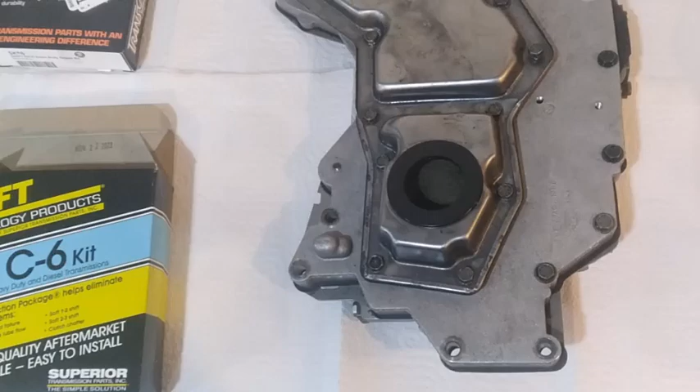Alright, I got everything here. I got two different shift kits, so I'll be able to replace every spring inside the valve body.

I've got to drill some holes, change some springs out in the kit, and I got a new filter for it. We're going to tear it all apart and put all new springs in the valves.

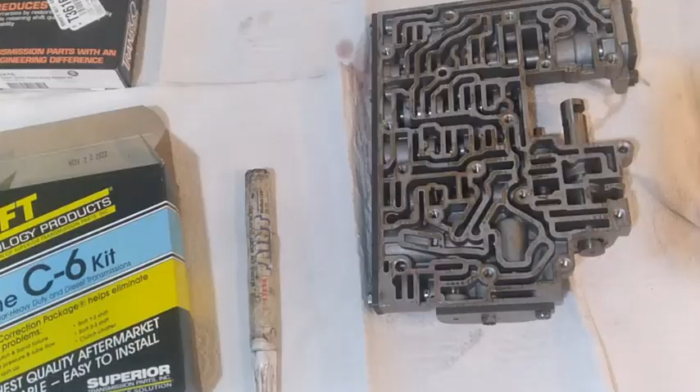And make sure this valve body's ready to go. Okay, so I got this valve body. First you take the filter off, then you split it away, and you get just the valve body.

So you want this to come off that plate, but the plate actually comes off like this because there's a check ball, two springs, and a spring and a hat. The spring and hat go right there.

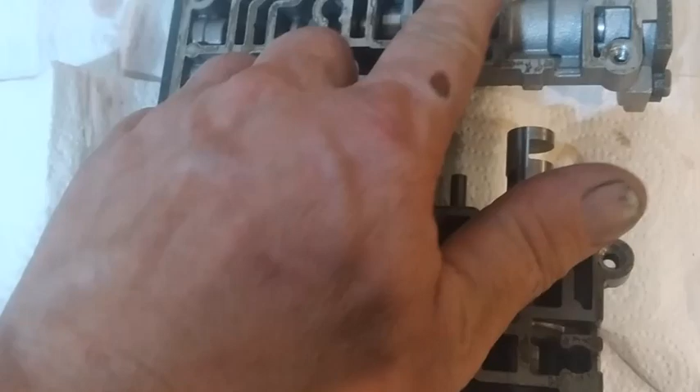One check ball goes right there, and the other ball and spring goes here. I've got an earlier model than '77, so there's no ball here.

So this is like a '76 by the casting number on the other side. That casting number right there. The letter tells me the decade, and the number is the year.

So what we're going to do is follow the directions on this rebuild kit. One of the things it tells me to do is drill a cross hole in this for heavy duty and towing in a diesel.

So what we're going to do is drill a hole. It says do not drill anything over a 16th hole in there.

The other kit says 0.055, which is not a 16th, and they give me a drill bit for it.

There's no hole drilled in there yet between those two pockets, and it had a minor shift kit put in it before.

So we're going to follow the directions and take every one of these valves out and put all new springs in, using this kit, before we put it back in — it was making this thing shift pretty hard.

And there's a couple other things in the other kit on how to sand the drum. I got a brand new band, a second shift band, and a brand new filter.

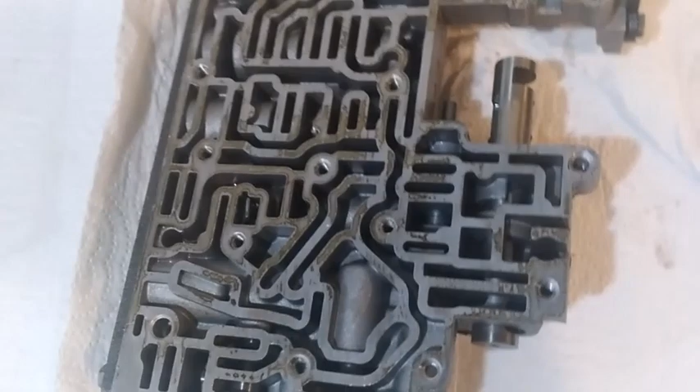I replaced that old filter, and we're going to start now. I'll show you each valve as I tear it apart and put new springs in it.

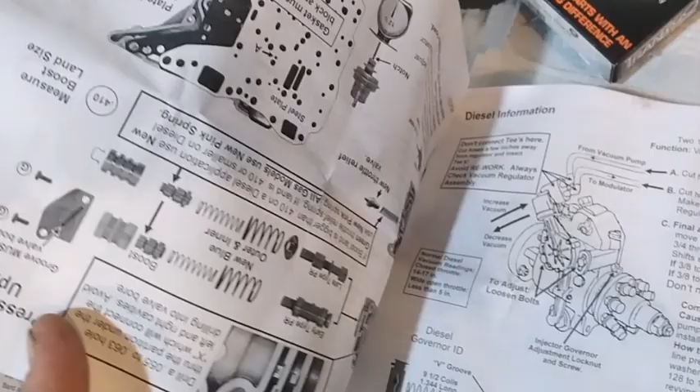Okay, so step one, we're going to use this kit — it comes with more springs in it, so we're going to try to use most of the springs out of this TransGo kit. There's a diesel and a gas version, but this is a gas application.

So the very first thing we need to do is pull this valve out here, which is the boost valve. So I got it all pulled out. I need to pull the boost valve out of the inside there and make sure it shifts.

But here's the factory set of springs, and we're going to put these new dual blue springs in, clean it up, make sure everything shifts, and then that end cap has to go back on with the groove.

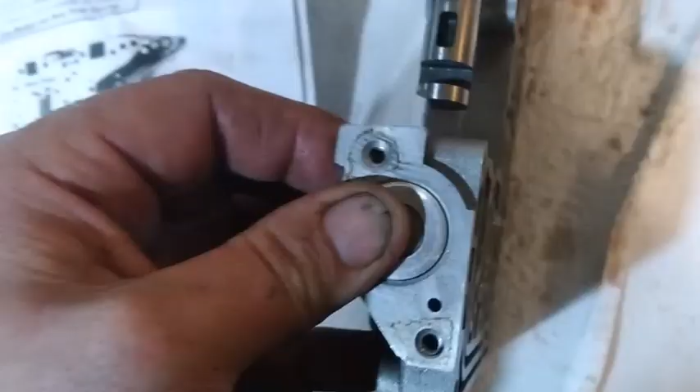So we're going to do that, put this valve back together now. Alright, I got it all back together, and it has to be able to drop down flush so that plate will come on, with the valve already seated all the way in.

So now I can put that plate on — it has a groove on the other side. I'll be able to put that plate back on and torque it to 40 inch-pounds. So we got this one valve rebuilt.

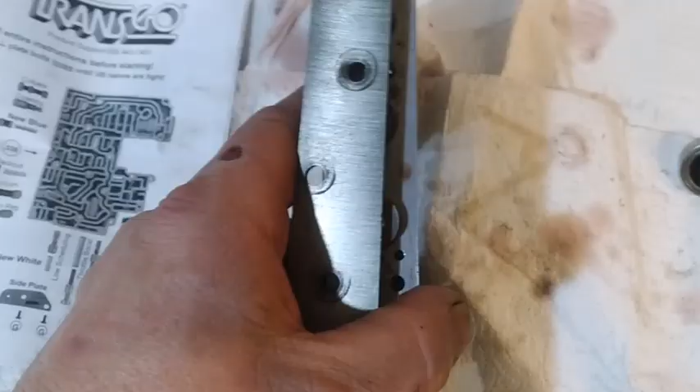Alright, so I've taken the side plate off these valves, and we're going to start going through and replacing the springs on it.

Okay, I got all the valves pulled out. The trick is to have a little magnet, and then you can go in there and fish out the stuff. Some things you just have to tap and let them come out.

The nice thing about the kit is if it doesn't come out exactly right and you lose the position, you can still figure it out — like that T and B valve fell out on me, and I knew it goes into that slot.

So what we're going to do now is just follow the directions and put the springs back, put this back together the way the kit says to. Now this cutback spring, we're actually going to use a spring out of the other kit.

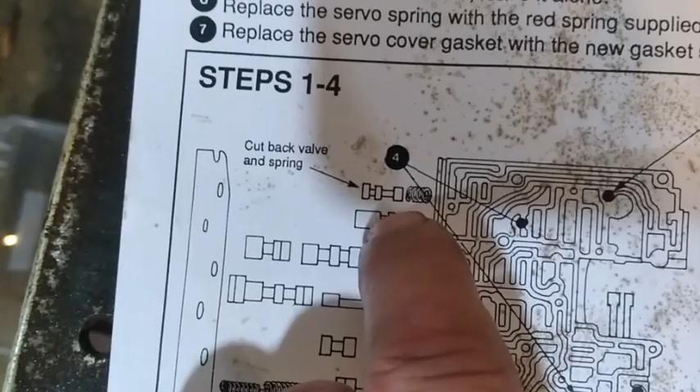There are people who completely block these off so that cutback can't happen at all, but we're going to force it not to be able to lose pressure, so it'll hold pressure longer with the spring instead of blocking it off entirely.

So this cutback — this kit doesn't come with the spring — we're going to use the spring out of this other one and put it in there.

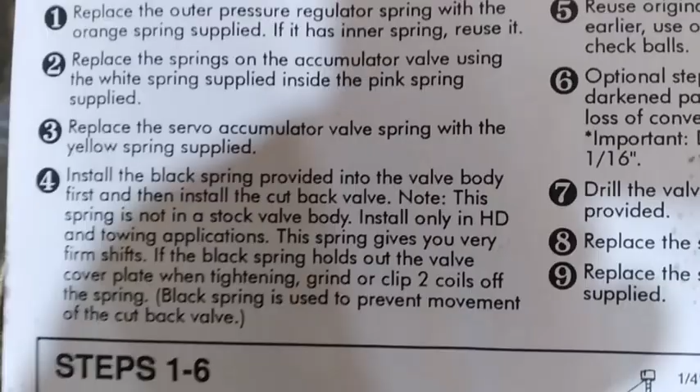All right, here's the directions on what that cutback valve spring is going to do. It says install the black spring in the valve body first, and then install the cutback valve. Note this spring is not in the stock valve body, and it's only for heavy duty and towing applications. This spring gives you very firm shifts. The black spring holds the valve cover open.

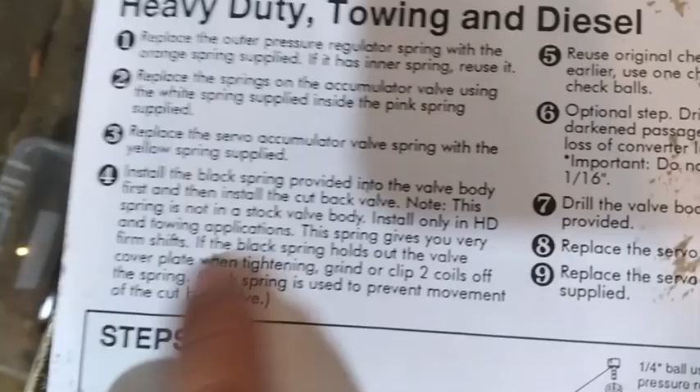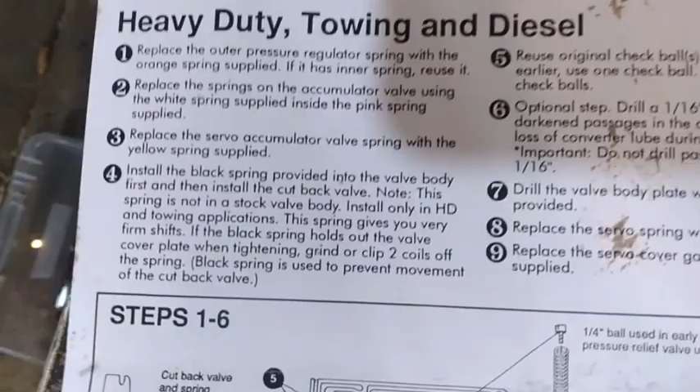We got to trim the spring so we can actually get that plate back on. So they're effectively blocking it off. Some people actually block it off, but we're just going to make it harder for it to push open. It's effectively blocking it off, but it's going to hold the pressure in there longer.

Okay, the coasting valve gets no spring, it just goes in. It's the next one in line. So we just want to make sure it shifts. If it's not stuck in there, we're good.

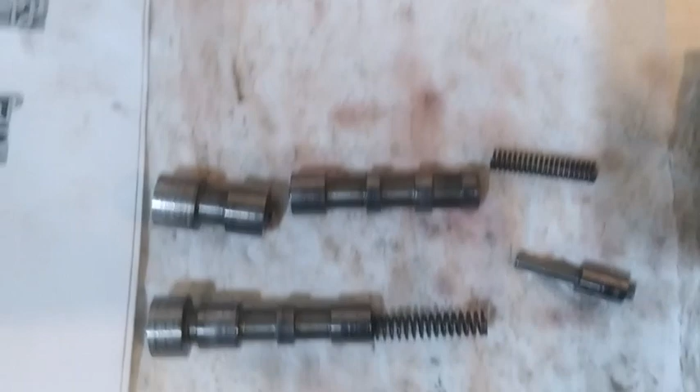So we're going to work on the first and second shift valve now. It tells us to put a new blue spring in. So we're going to get the blue spring out of the kit and put the first and second shift valve in. You can see the difference between the new blue spring and how easy this one is to push. And it's not as long.

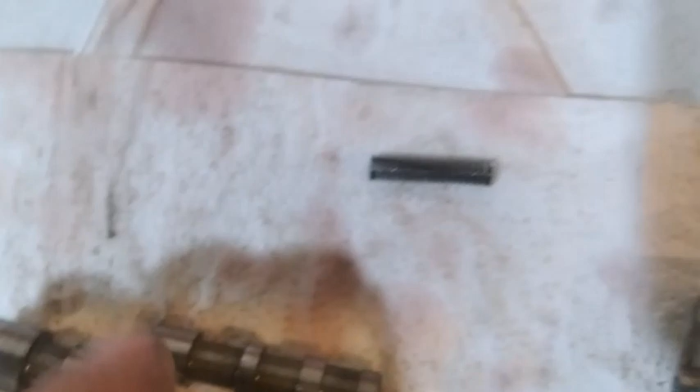So we're going to put it back together. We're going to clean all this off, make sure it shifts, put the blue spring in, shove that first and second shift back in. Okay, I found my blue spring. We're going to put it in the hole and put the first and second valve in. Alright, so I got that first one in and I've made sure it moves.

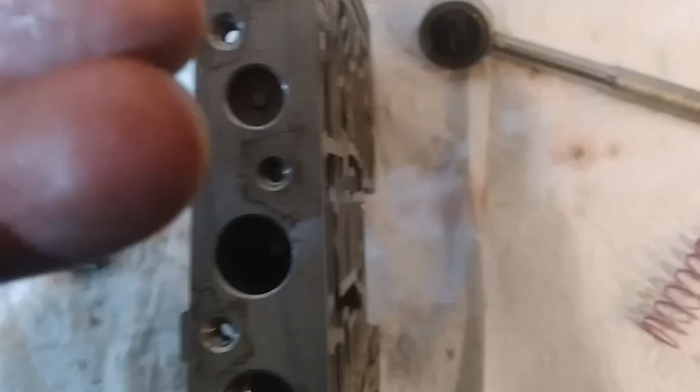Now I can drop the second one in. Of course, I got the drawing to look at and make sure that it goes in the same way. If nothing else, this drawing is worth the 26 bucks on eBay. So we play with it, it'll drop in there. You see how it's in there and moves freely. So that's what we're checking with these valves.

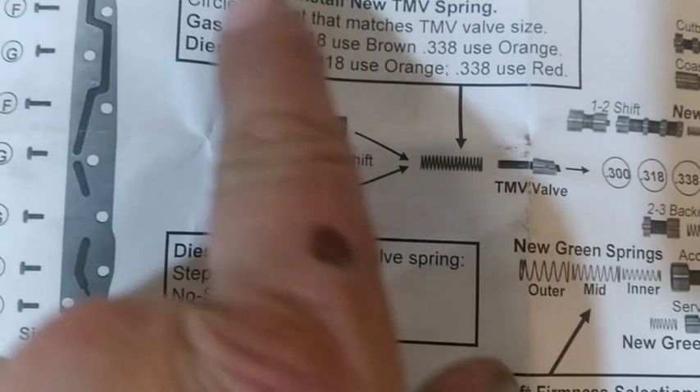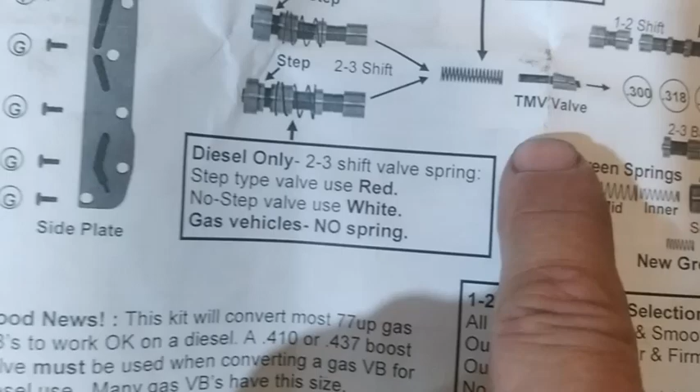Okay, so now we'll go to the second and third shift valve and get it to go in there with the new spring. Now the second and third shift valve tells me to measure the TMV valve. So circle the spot that matches the TMV valve size. So I need to measure this hole for the size of this TMV valve, and then match the size to it.

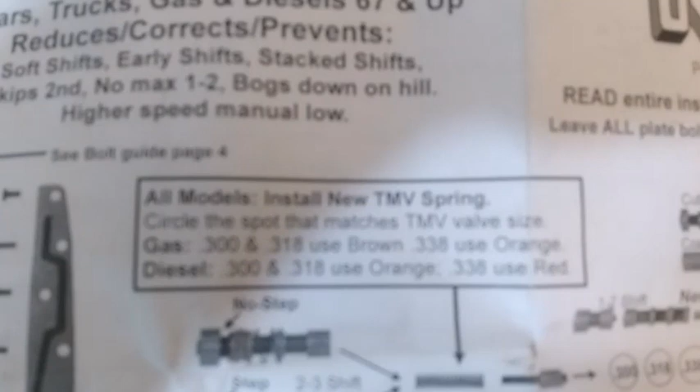So I'm going to mic it and see what I got here. So mine's a .300. So it tells us to grab, on a gas application, .300 and .318 should be brown. So I got to get the brown spring out of the kit.

The difference between the brown spring and the stock spring, it's a little bit longer and a little bit tougher, so it just makes this thing shift harder. So we're gonna take and put the brown spring in now on top of the TMV valve. Now I had to take that TMV valve and use a little awl to get it started. I already know that it's slid in and moving around like the other one. So we're gonna put the spring in on it and then put the rest back.

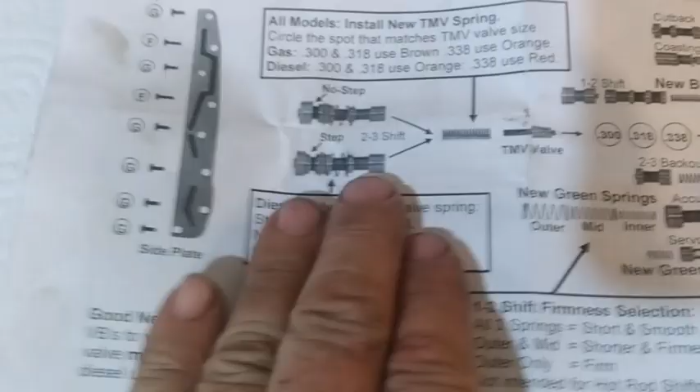If it was a diesel, there's two different springs for the diesel depending on how the valve is. I have a no-step valve and I'm using a gas application, so I don't use this extra spring. The diesel has more torque, so they hold it even harder. So we don't use this spring, and this box and that spring don't matter to us.

So neither kit messes with the 2 to 3 back out spring, so we reuse the factory spring. Of course, we tested, that valve is going up and down, not stuck. So we'll put the 2 to 3 back out valve in now.

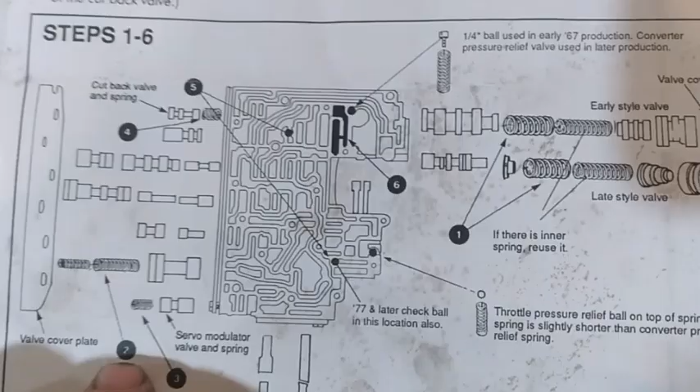This kit gives us 3 different springs for the accumulator spring and first to second shift firmness. We're going to use the springs out of the other kit, where it just tells us to put these two together. So it tells us to put the pink and the white one together.

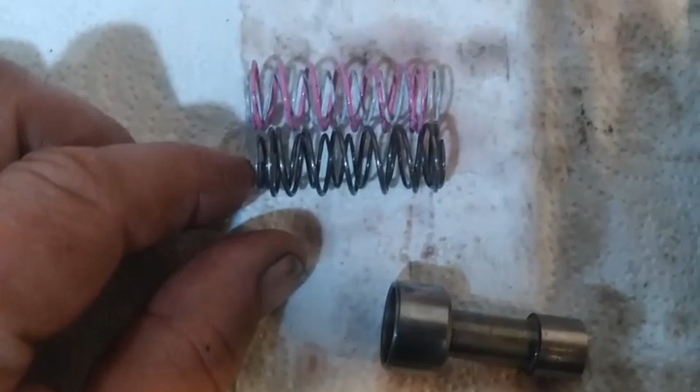So first the accumulator goes in. You can see the difference here. Let me lay the valve body over so I don't lose the work that I've done. So there's the factory ones, and it's pretty close to being the same. But we're going to put these new springs in from that kit, the pink and the white one.

And put the accumulator back in. This is the one that you'll see guys machine a piece for, or even stack full of pennies, when they build drag cars, to where this one cannot move at all. We're not going to block this one all the way off because we're not building a drag car. We just want this thing, if I hook up a bobcat or something behind it, to actually pull way into the gear before it shifts. He actually uses those 410 gears and the lower bands in the transmission.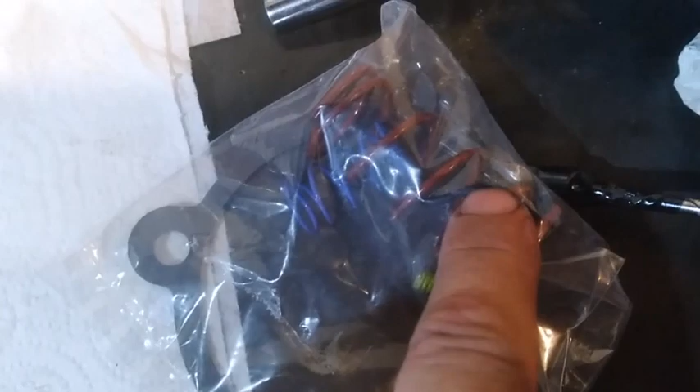Okay, I'm gonna put this accumulator together now. So the next one is the servo regulator pressure, and since we're going to use the large servo spring from that kit, we're going to go ahead and use the yellow spring that it calls for that servo modulator. So inside the servo, inside the transmission, we're gonna put that in instead of the factory spring. But we'll use the yellow one since we're gonna use them together on that, and not use this kit's spring.

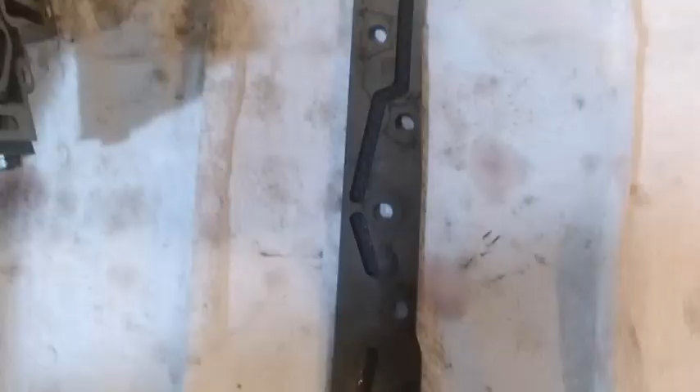All right, so we're gonna put this together now. So putting the end cap back on, you see the passageways. So that has to go in. It's actually upside down right now. So just letting you know that has to be put on right. You're not going to see those once you get it bolted on. So remember how it told us to make sure that was drawn back all the way. So that plate's on, and we got the channels to the inside. You can only bolt it on one way. I mean, you can put it on two ways, but you'll see the channels if you do it wrong.

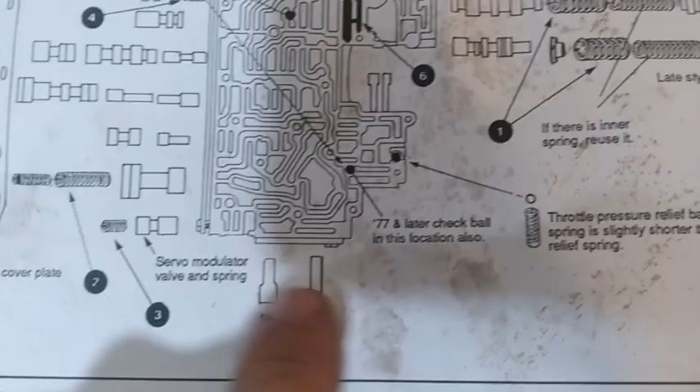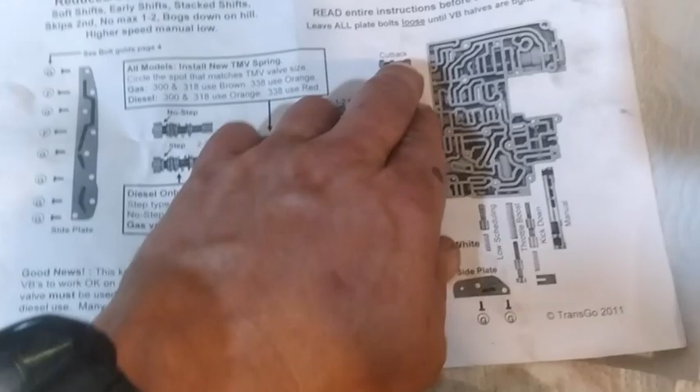So we got all these valves rebuilt, and we got this valve rebuilt. So now it tells us to take the low scheduling valve, the throttle boost valve, and the kickdown valve out, and change these springs. Actually, it only tells us to put the new white spring in on the low scheduling valve. And this kit doesn't even show that one to be touched. So the TransGo kit is a little more in depth than the Shift Technologies, and they cost the same, but it doesn't make the cutback valve for first gear.

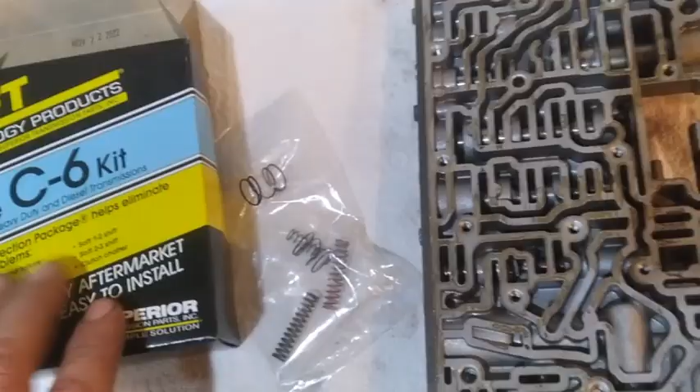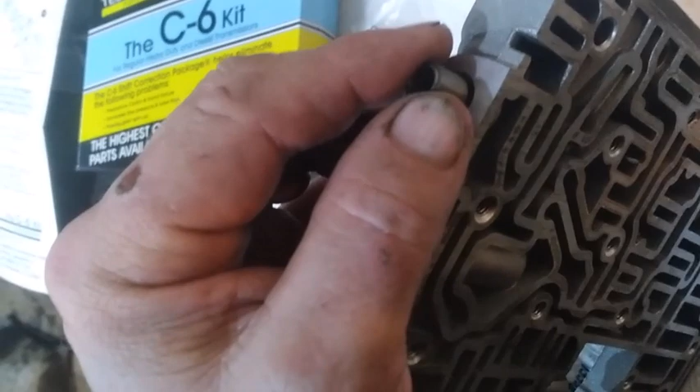Okay, so the low scheduling valve, I've taken it out. I've had to tap it out to clean it, but I got it to where I know it'll go in and out there and float around. So I see it moves. And then the throttle boost valve here, I just made sure I've got it cleaned and made sure that it moves. So now I put the white spring in there and put the cap back on.

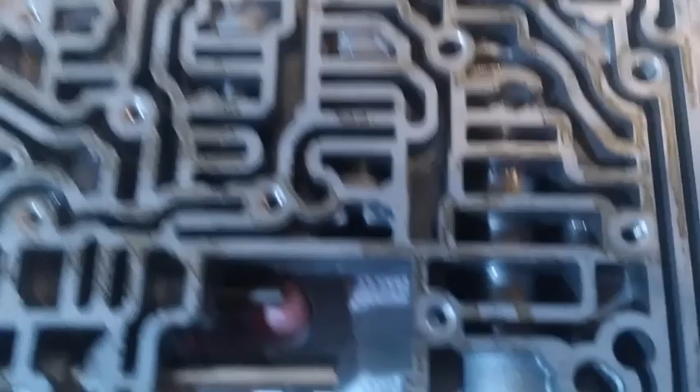The kickdown one, you can take that plate out, but you see how easy it moves. That's where that kickdown fork is going to push. So we don't need to take it out. I'm going to put that white spring on there and then put the cap back on. This cap's the same way as the other one. It has a groove in it, so the groove has to go towards it.

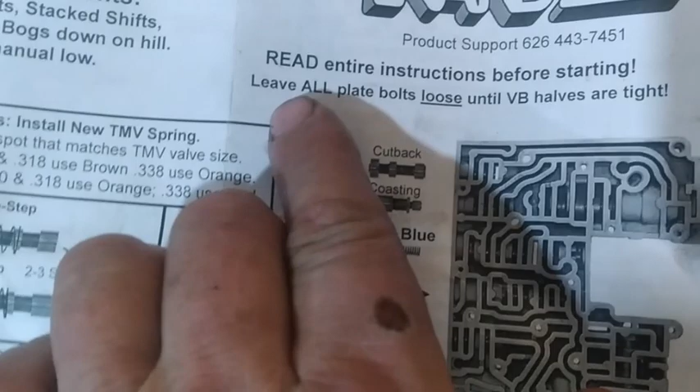And I just noticed these instructions may be a little bit better because it says leave all plate bolts loose until the valve bodies are together. So all the ones that I've torqued, I'm going to loosen them back up. But I need to tighten this one down to make sure that cover pulled tight, like it said. So I'm going to loosen all the covers back up and then put the valve bodies together and then do the inch-pound torquing. Okay, new white springs on. This valve still moves in and out. Put the cap plate back on the right way.

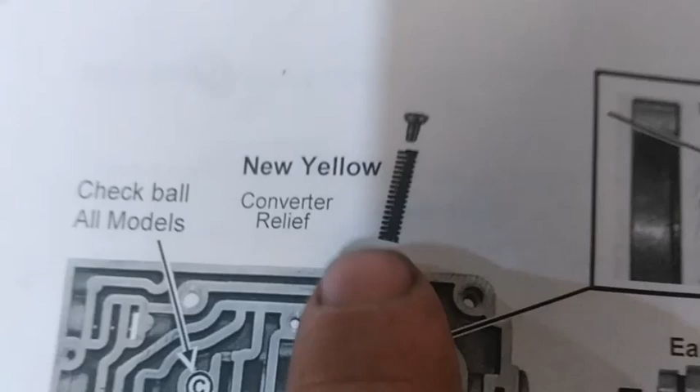Okay, the directions show to use the yellow spring for this converter relief. New yellow converter relief goes in this hole in the valve body. So when we go to put it back together, this and the hat goes in there.

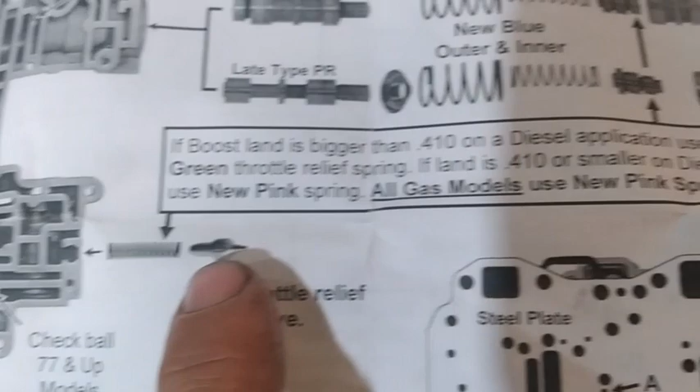And then the 77 later has a check ball that goes here, and they all have a check ball that goes right there. This was really hard information for me to find earlier when I took this apart. But if you buy the kit, it all comes; it says check ball, all models, check ball 77 and up. And then it gives me a new throttle relief valve instead of using a ball. It uses this pin valve.

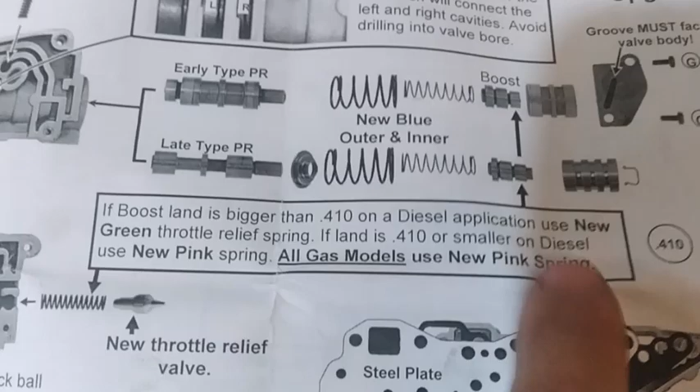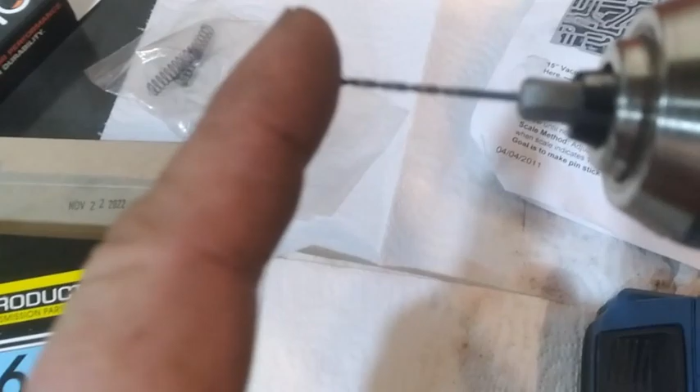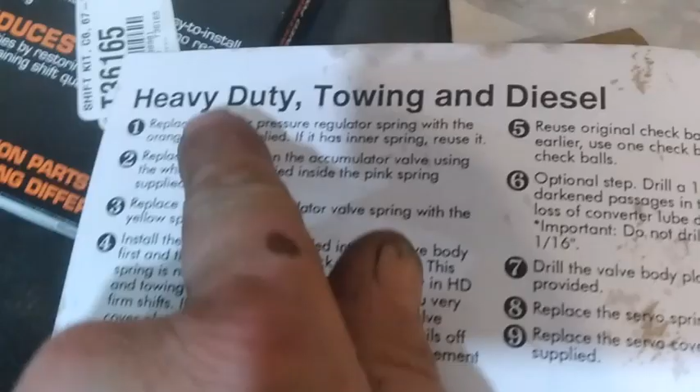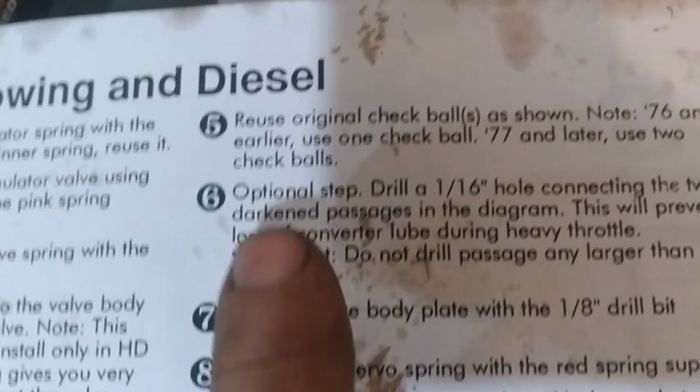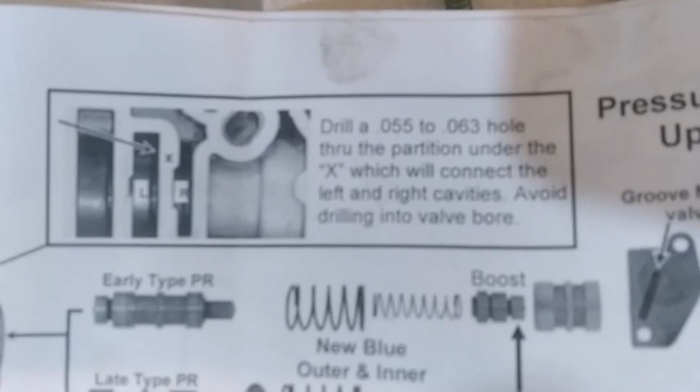This kit here on the heavy duty side, for towing and diesel, says to do it. And it's right here, number 6. It says it's an optional step to drill a 1/16 hole. So we're going to drill the smaller hole, but it says do not drill bigger than 1/16, and this prevents the loss of converter lube during heavy throttle. So you can't drill it bigger than 1/16. So we're going to drill it the size. This one gives you a little better information, instead of just a sloppy hole. If you notice, the picture for the port on 6 is actually a little bit better.

So it's this wall right here that needs drilled. And I've checked the valve body, because somebody else could have come in here and put a hole in. So we're going to drill a hole right there in that wall. And then we're going to spray it out with brake clean. We're going to do it with the valve in there so it can't get caught up inside the actual bore part. So we're going to drill right there in between that wall. And then we're going to blow it out really well.

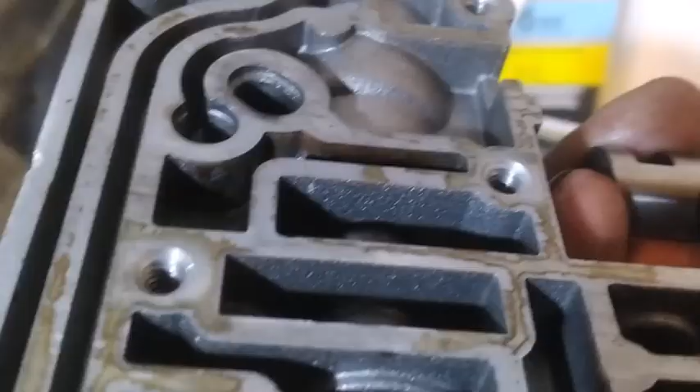All right, so you see I got a hole drilled in there. And it's drilled in the passageway that both kits show you to drill it in. So I touched that other wall, but it didn't actually go into anything. It was really easy to drill. It's just cast aluminum. So here we go. That's going to keep converter pressure lubed, they say. So that was that. Now it tells us to drill holes in this actual valve body.

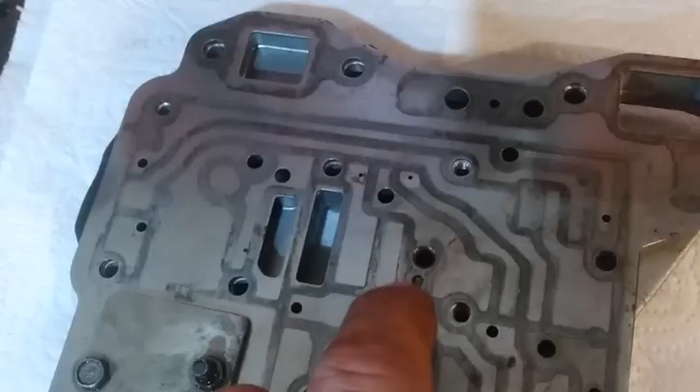So this hole A right there in the valve body says on a gas we need to drill it out 0.076 to 0.089. So we're going to take this plate off by taking these 3 bolts out and unbolt it from the other side, and we're going to drill that plate open. Remember when I said somebody put a shift kit in this before, I don't know how many decades ago. That's already drilled out to size. So I put an .089 drill bit in there and it drops in. Now this kit actually says to drill it with a 1/8 inch drill bit, and they provide a drill bit.

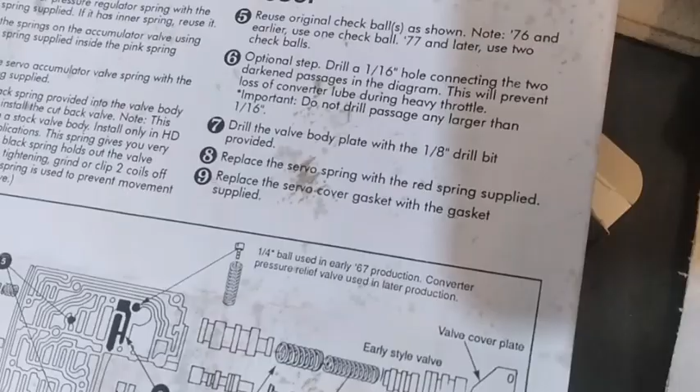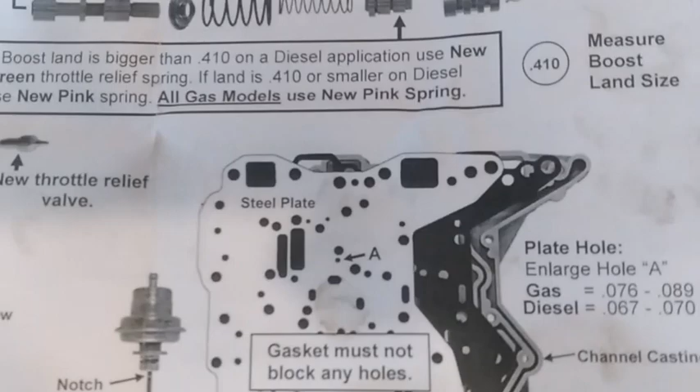So it's already drilled. The 0.090 drill bit drops right in. And for gas, it says to drill it for 0.089. So we're gonna say that hole's drilled already. But check that hole in case it isn't to size by dropping a pin or a drill bit in it. Now I'm going to check, like it says, visually that none of the holes are blocked by the gasket. So I'm going to look at it. And then if it's all done, we're going to put it back together. It's basically a full valve body rebuild, and it's put together pretty tough.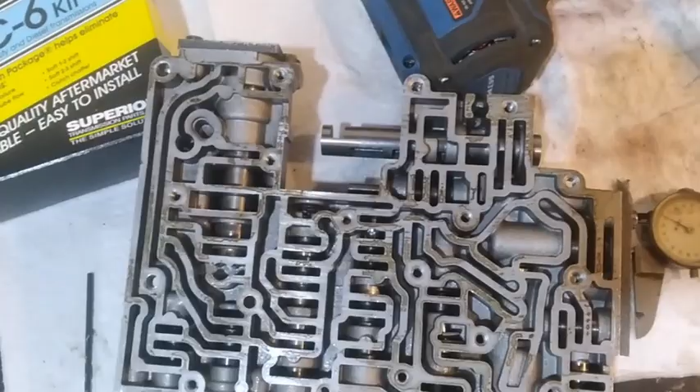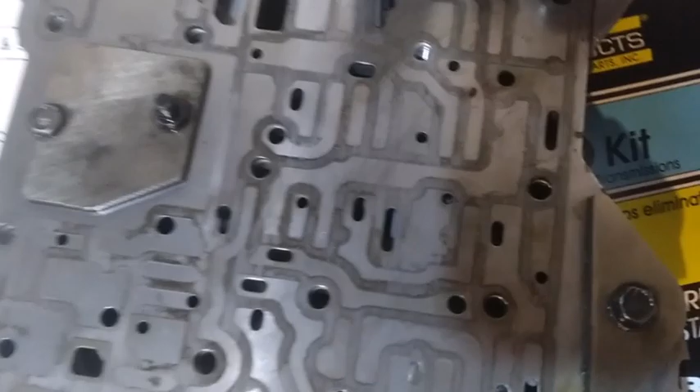So you can see I got a drill bit here. It says 105, and it drops right in that hole. So that A hole right there has already been drilled on this valve body, so we don't have to do that. I just got to make sure none of the holes are plugged here, with the gasket that I put in. I've already put in a gasket. I blew it all out very clean and cleaned all the fluid out, all the dirt out of it. It's got a new gasket.

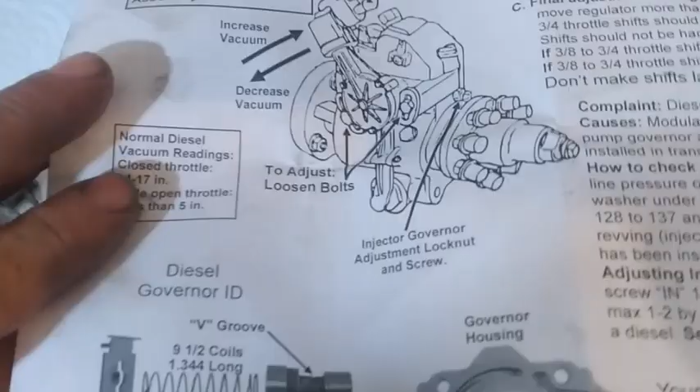It's already been torqued. Directions say to leave these bolts loose, and these are actually supposed to be 25 to 30 pounds. This direction set is a lot better. This Transco kit, you can buy it off eBay. It tells me the bolts, the types, tells me how to do the governor stuff. It tells me the bolt lengths, bolt specs.

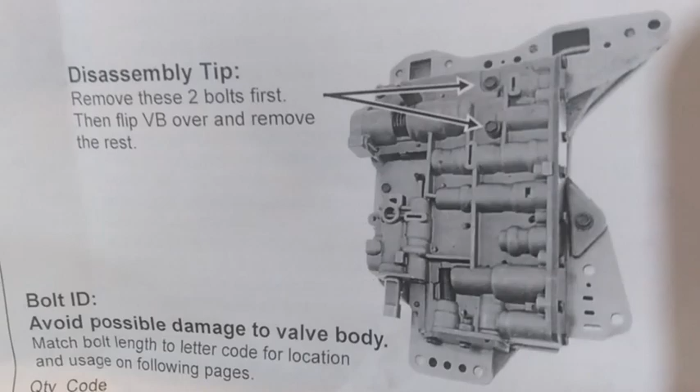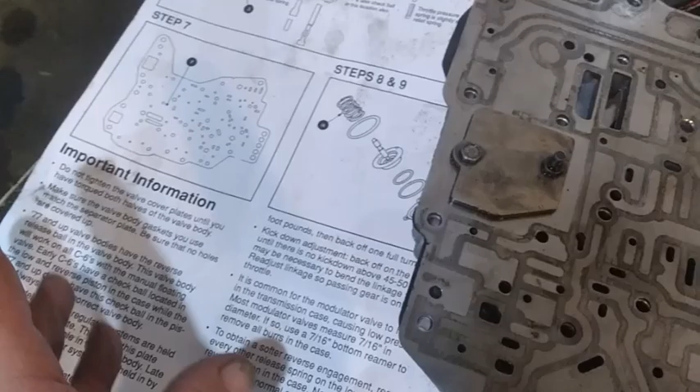So, and it tells me how to do band adjustments, kickdown adjustments, vacuum modulator. So this is probably a better kit, but I've used some of the servo stuff that doesn't come in that kit. It comes in this one. This one probably just gives you second or third gear shifts. Between the two, it's really gonna put that transmission to work.

So, all right, I'm gonna loosen this up like it told me, and I'm gonna bolt the two together and call it a valve body rebuild. All right, so I've dropped a new pink spring in and a new valve instead of the ball. I don't really know what that's doing, but I got the converter relief and the new yellow spring, and then the 1/4-inch ball. Like I said, if you have an older one, it'll drop in right here. But I recommend at least buy one of the kits, and then you'll have all the information on this stuff. And the other ball will drop in right there.

It took me forever to figure that out, because when I thought I had everything out and I turned it over, it fell out. I didn't know where it came from. So I got hours in finding that it goes right there, especially if you have one of these older valve bodies. And it's all cleaned. It's all been brake cleaned. The gasket was stuck to it, so I got a new gasket and everything. So we're gonna put this together and tighten it down now.

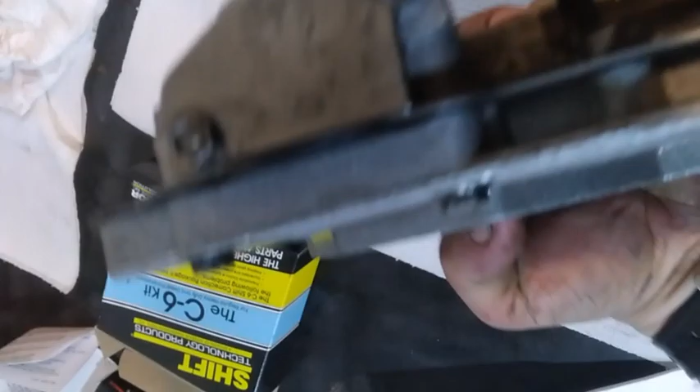All right, so I got the two halves bolted together. Now this one with the tag is a longer bolt, and this one right here on this boss that's raised up is a longer bolt. All these other bolts are the same. And then I tighten down the caps. All the end valve caps are all tight now. So now I'm ready to put the new filter on. So I got a new gasket, and I got a new 4-wheel drive filter. One of these bolts is longer too, and I'll have to figure out which one it is.

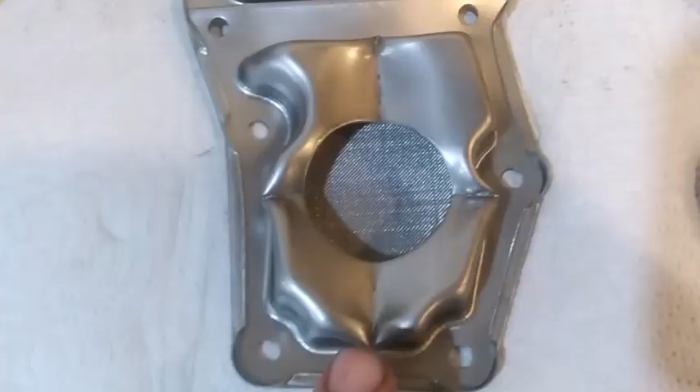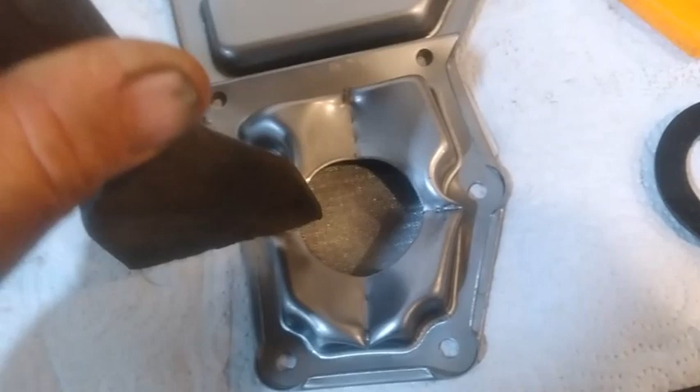So we're going to take the rubber out of that new filter, and we're going to take some kind of chisel and knock it down on all 4 sides. So even if that pan was to get knocked up in there, 4-wheel driving around, it most likely won't shut this all the way off. It'll still be able to suck it through the filter. Now when I opened that thing up, it sliced me, so watch it when you bring it out of the bag. I got sliced pretty good. So we're going to figure out which one's the long bolt, and we're going to bolt this new filter on.

Okay, it's this bolt right here, that's the longer bolt. It goes into a long boss over here on the other side. See it right there? So that's the longer bolt. And then you notice now with this crushed that it can't ever get blocked off. That rubber seal that was in there, if that pan came up against it, it could just suck it dry.

So we're gonna do that, and I lightly tapped it to get the warp around, so you see the gasket's all sealed up. But if that pan comes up in contact again, it'll never go dry that way. I mean, I guess you would really have to smash it. But that's a transmission builder trick that I've seen on these. So now the whole valve body's done, and it's ready to go in the truck.

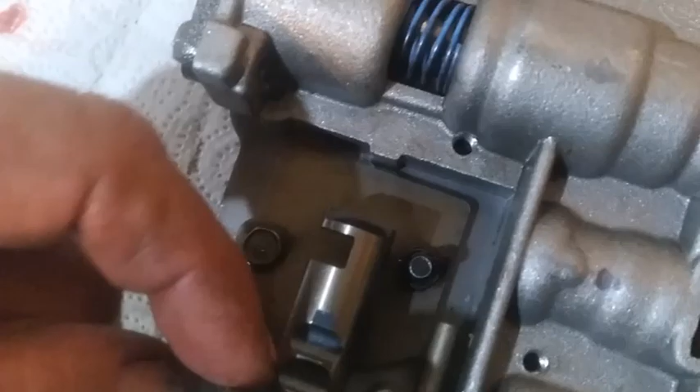It's got all these springs. I'm not running on 50-year-old springs, and all the valves move, and everything should be pretty high pressure, and I feel pretty good about it. So it's got a shift kit put in it basically, and it's a detent valve body. So how do I know it's a detent valve body? See those detents in there? The non-detent valve body has a big flat spot in it. I got one over there I can show you. But this one, I can hold it in first or hold it in second. If you put it in third gear, you can pull it down and hold it in second or third. And so she should be a good unit now.

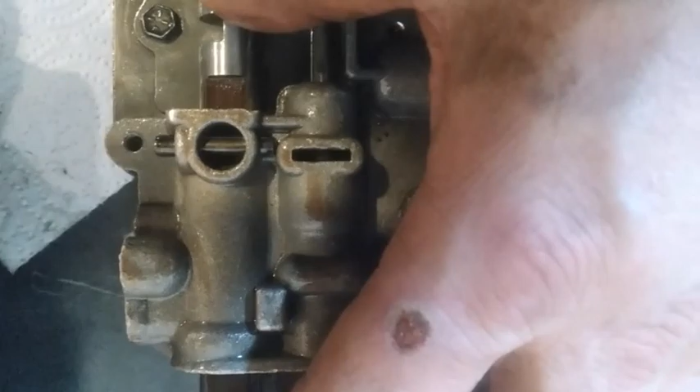I'll go show you that other valve body. So you see how that valve body doesn't have any detents, it just floats. So you put this in drive, even if you pull it into second, if you're up too high in second, it won't hold second. It'll go ahead and shift itself into third. But with this valve body with the detents, if I'm pushing snow or trying to put a big load up a hill, I can keep it in second, where this valve body won't. So we rebuilt this one and souped her up, and we have a spare to go back to if it doesn't work well.

But if you're wanting to do these kind of C6 valve bodies, I recommend looking up either Nick's Transmissions or Performance Transmissions on YouTube. Both of them helped me a lot in rebuilding these. Now, I don't think their pictures were close enough for me to see some of the stuff. So anyway, I feel good, and we'll build the transmission and shove it in there.